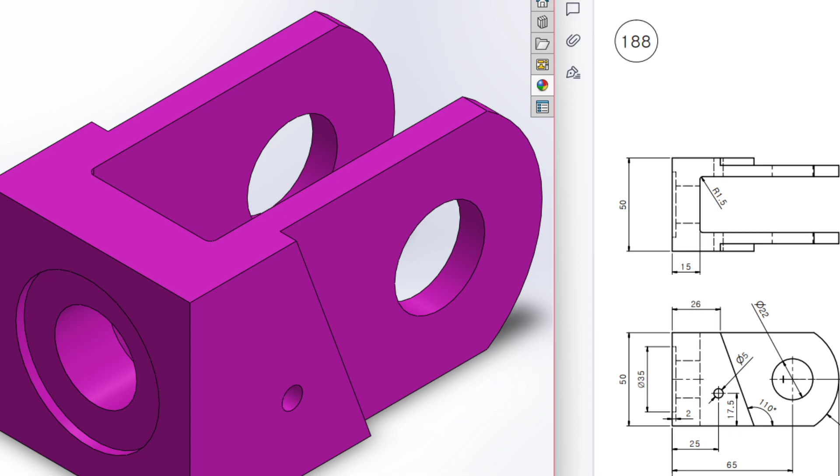Today we are going to solve this 3D problem. In this 3D problem, this is the top view, this is the right side view, and this is the front side view. Okay, so let's start drawing.

So in a sketch, I will start drawing from the top plane. In the top plane, I will draw a rectangle. This rectangle has a dimension of 50 by 90 units. Then I will extrude it to 50 units. After that, I'll draw a fillet here, and this fillet has a dimension of 30 radius.

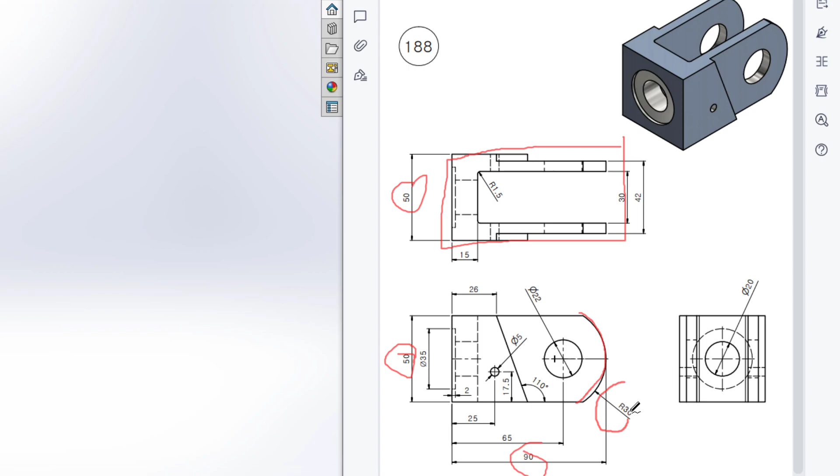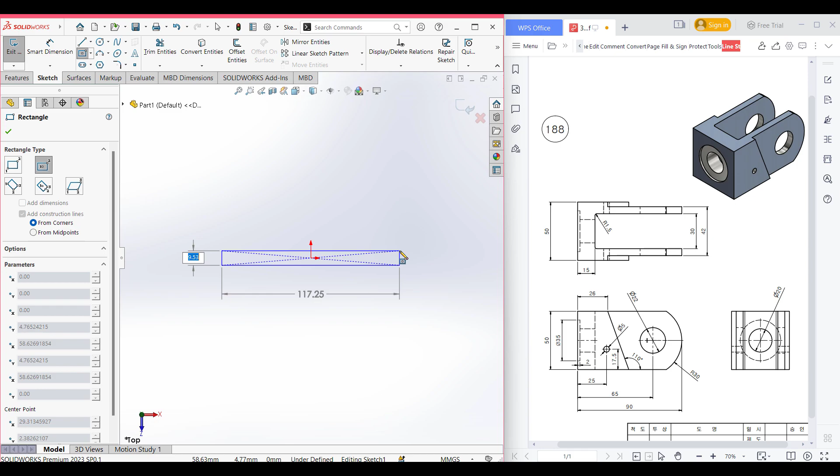Let's go back to our sketch and do this. First of all, I'm selecting the top plane here. Right click on it, sketch, normal to it. After that, select the center rectangle from here and draw a center rectangle of 90 by 50 units. Now isometric it for a better view.

Now go to features, extrude boss it to 50 units from the mid plane, and press OK. So this portion has been done. Now it's time for the filleting. I'm going to select the fillet option from here and select the fillet from this surface. Okay, now we have a radius cut.

For that I am selecting the right plane here. Now sketch, normal to it. After that I am going to select a center line and draw a center line of 30 radius, and from that I will select a circle and draw a circle. Okay, this circle has been drawn.

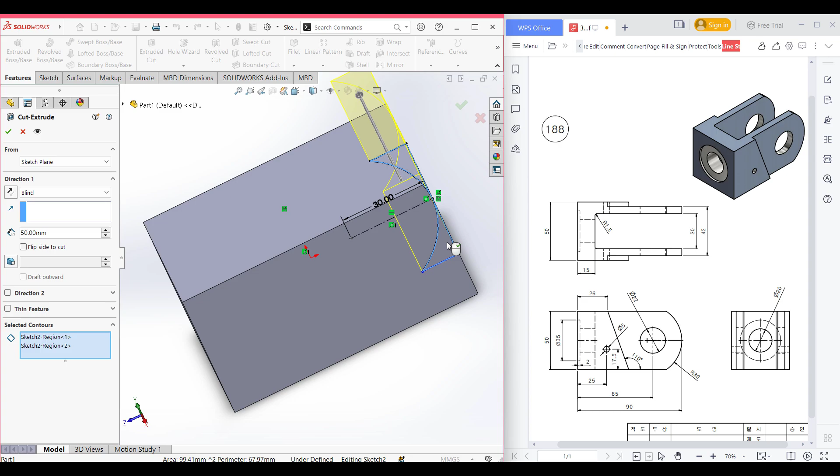Now I am selecting this inner rectangular face and converting it. Now select the trim option and trim all the lines that we don't need. Press OK. Isometric it for a better view. Now go to features, extrude cut it through all both, and press OK. Let's go back to our sketch.

In the top face we have a rectangular cut here. For drawing this rectangular cut, first I'll draw a center line with a dimension of 90 minus 15 units. Then I will offset two lines with a total dimension of 30 units, so the half dimension will be 30 divided by 2, so 15 units. Let's go back to our sketch and draw this.

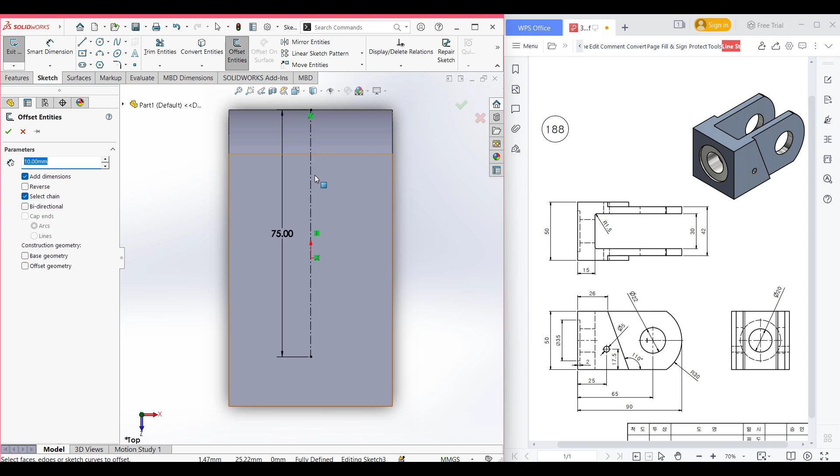I'm selecting the top plane, right click, sketch, normal to it. Select the center line, place it here and draw a center line of 90 minus 15 units. Now go to sketch, offset entities, select this line and offset it to 30 divided by 2, so 15 units. Bidirectional, cap ends, line, and press OK.

Now isometric it for a better view. Go to features, extrude cut it through all both, and press OK. So our extrude cut portion has been done. Isometric it for a better view, and let's go back to our sketch.

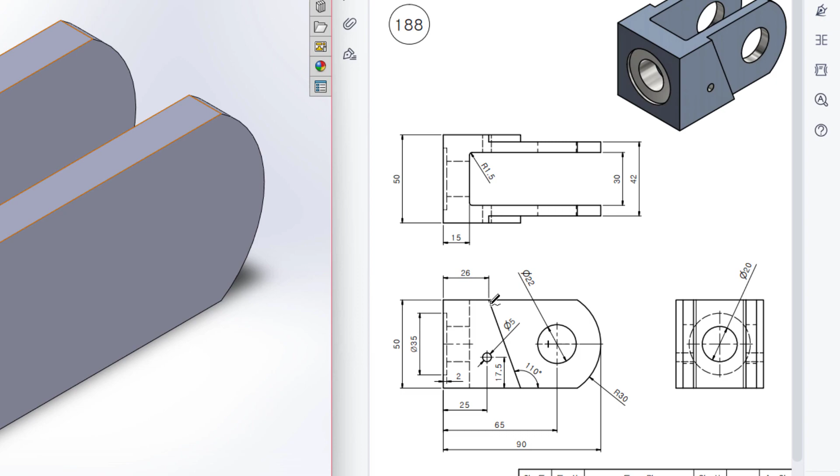We have an incline cut here. For that I will draw an incline line and dimension it from this point to this point as 26 units. From this line it has an angle of 110. Then for this cut portion, the total dimension is 42 units, so 50 minus 42 is 8 units, and the half dimension will be 8 divided by 2, so 4 units. Let's go back to our sketch.

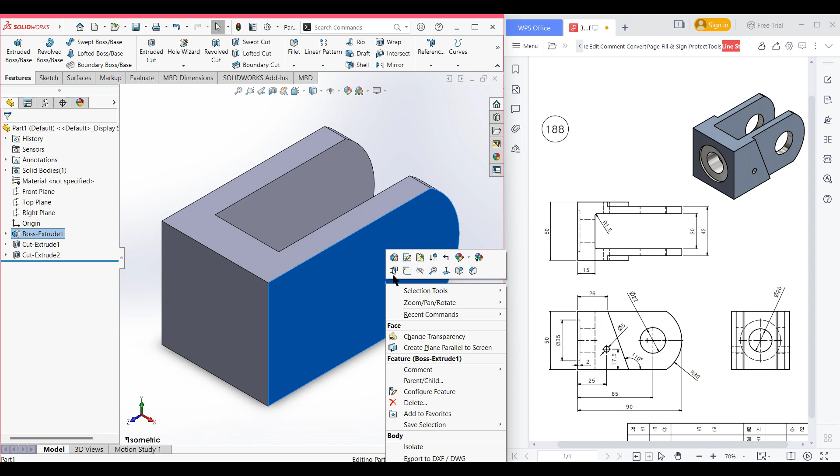Selecting this face, sketch, normal to it. Select the line and draw an incline line, then select the smart dimension tool, and from this point to this point there is a dimension of 26 units. Press OK. After that, from this line to this horizontal line, the angle is 110.

Okay, now press OK. Now select this face, now convert entities and trim the unnecessary line that we don't need. We don't need this portion because we will extrude cut this portion. So press OK. Now isometric it for a better view.

Now go to features, now extrude cut, now extrude cut it to... now select the blind tool from here and now dimension it to 50 minus 42 divided by 2, so it will be 4 unit. Now press OK. So our extrude cut portion has been done.

Now select the right plane here and after that select the mirror entities, and from the features to mirror we want to mirror these features. Now press OK. So our feature has been mirrored. Now again let's go back to our sketch.

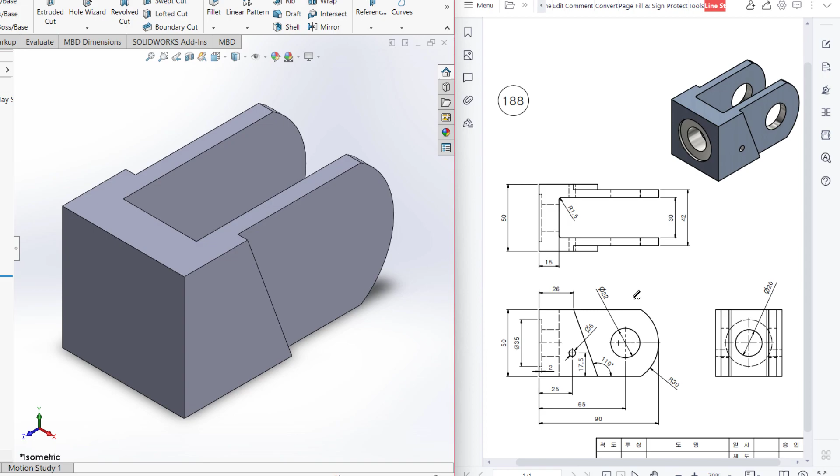In our sketch we can see that we have a circular cut here, and this circular cut has a diameter of 5 unit and it has a distance of 25 unit by 17.5 unit. Then again we have another circle here and this circle has a dimension of 22 diameter and it has a distance of 65 unit.

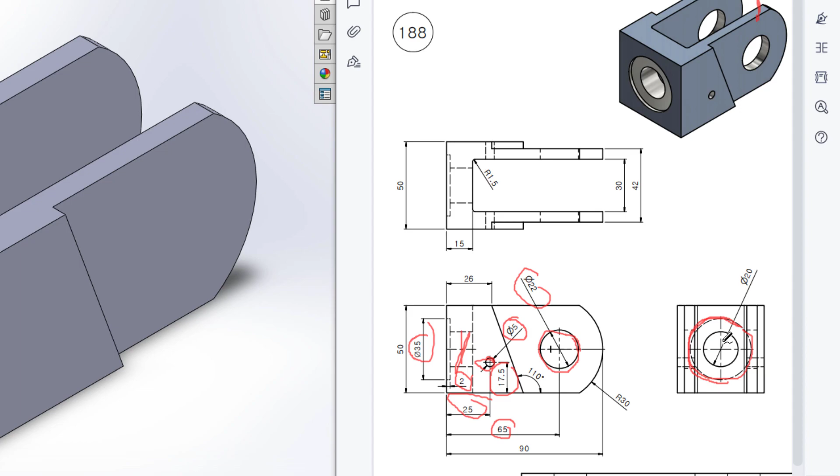And on the front face we have a big circular cut. Actually this is the back face, okay, this side back face. So if we see in the front plane, this circle has a dimension of 35 unit and it has an extrude cut of 2 unit. Then we have another inner circle and this inner circle extrude cut has a dimension of 20 unit. Okay, let's go back to our sketch and complete our sketch.

So first of all I am selecting this face. Now right click on it, now sketch, now normal to it. Now select the circle and draw a circle of 5 diameter. Now select the smart dimension tool, and from this point to this horizontal line the distance is 17.5 unit and from this circle to this vertical line the distance is 25 unit. Now isometric it for a better view.

Now go to features, now extrude cut, now extrude cut it through all both. Now press OK. So our extrude cut portion has been done. Now isometric it for a better view. Now again select the right plane. Okay, now sketch, now normal to it. After that select a circle and draw a circle of 22 diameter.

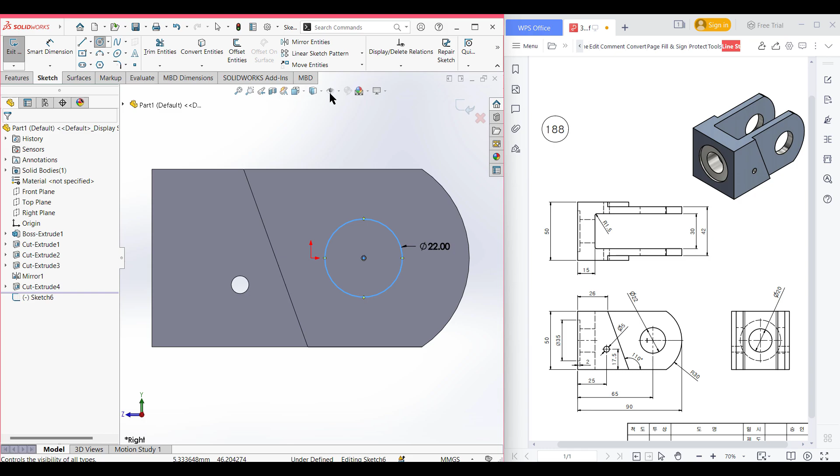Okay, now select the smart dimension tool, and from this circle to this vertical line the distance is 65 unit. Now isometric it for a better view. Now go to features, now extrude cut, now extrude cut it through all both. Now press OK. So this extrude cut portion has been done also.

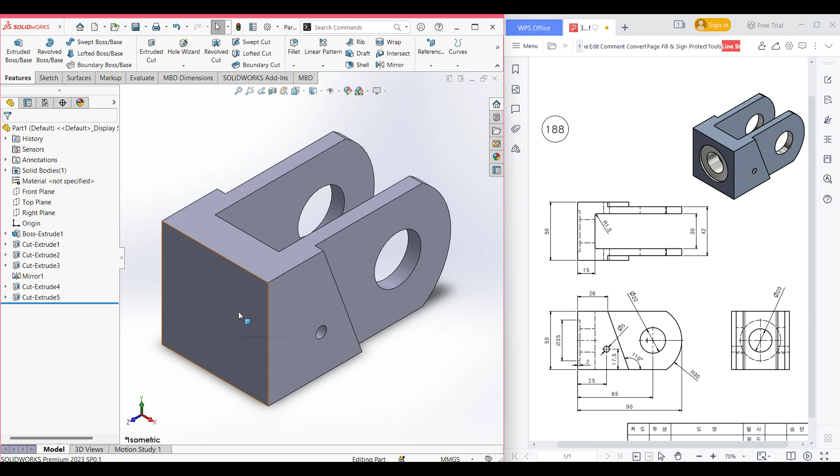Now select this front face, now normal to it, sketch it. Now select the circle and place the circle here and draw a circle of 35 diameter. Now isometric it for a better view. Now go to features, now extrude cut, now extrude cut it to 2 units. So select the blind tool from here and dimension it to 2 unit.

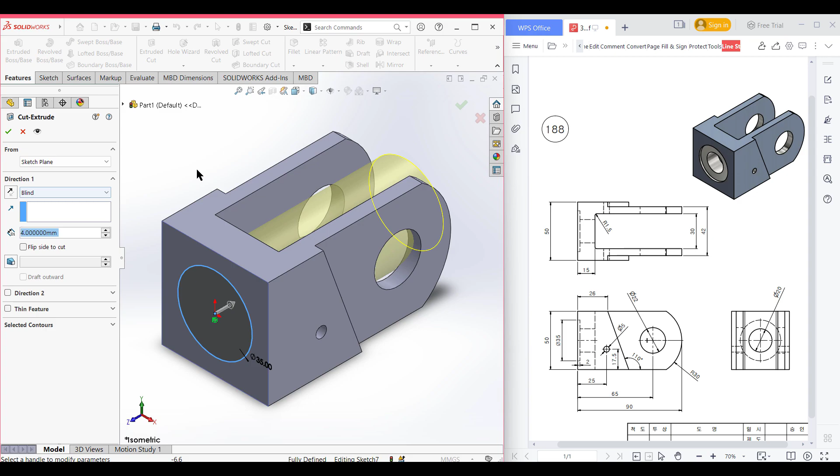Now press OK. Again select this inner face, now sketch, now normal to it. Now select again a circle and draw a circle of 20 diameter. Now isometric it for a better view. Now go to features, now extrude cut, now extrude cut it; you can pull this arrow. Now press OK. So this portion has been also done. Now isometric it for a better view.

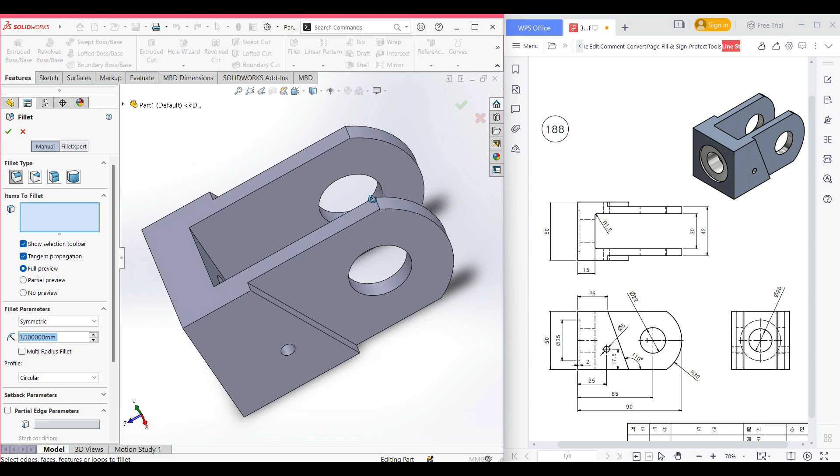If we look back to our sketch, we have a fillet of 1.5 unit here. So we will do the fillet. So I am selecting the fillet option from here and dimension it to 1.5 unit. Now rotate your sketch and select this inner portion and select this portion also. Now press OK. Now isometric it for a better view. So as you can see, we have done our 3D sketch.